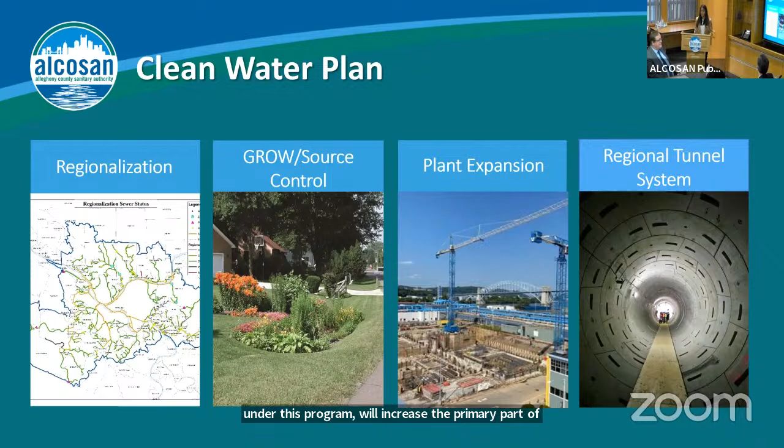These are the 9 projects under this program, which I'll go into in detail in the coming slides. The packaging and sequencing of these projects were done to minimize impacts and not overwhelm ongoing activities, since the treatment plant operates 24/7. It is active throughout, and at the same time we needed to make sure the phasing of construction maintains compliance with the consent decree milestones.

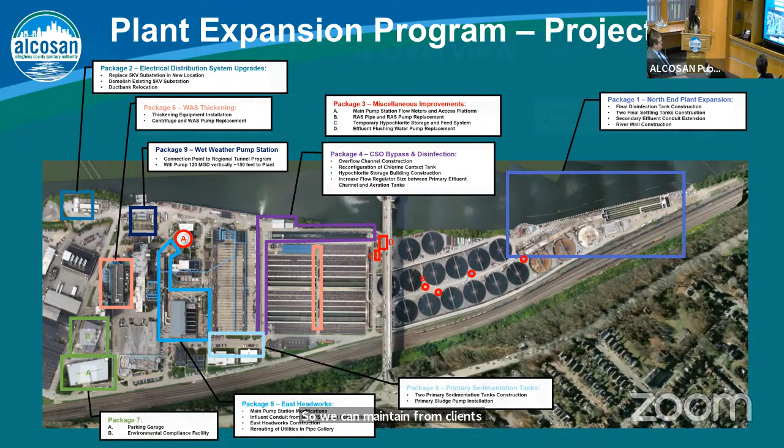The first milestone under the consent decree was to increase the plant capacity to 480 MGD by the end of 2025. The projects highlighted here are necessary to complete this milestone, including the North End Plant Expansion Project, the East Headworks, the CSO Bypass and Disinfection Project, and the WAS thickening.

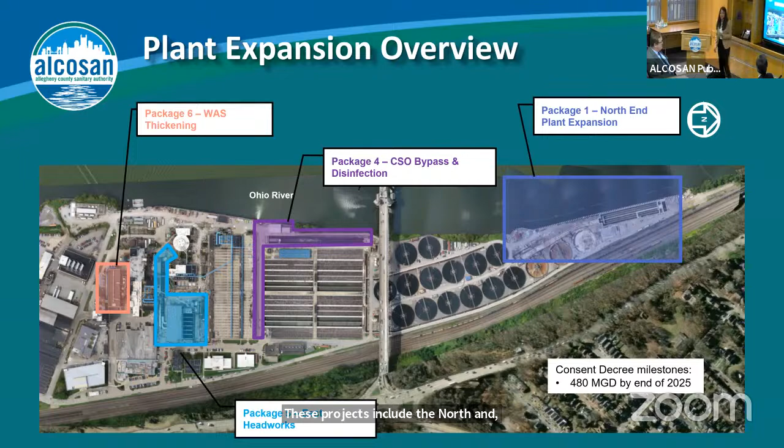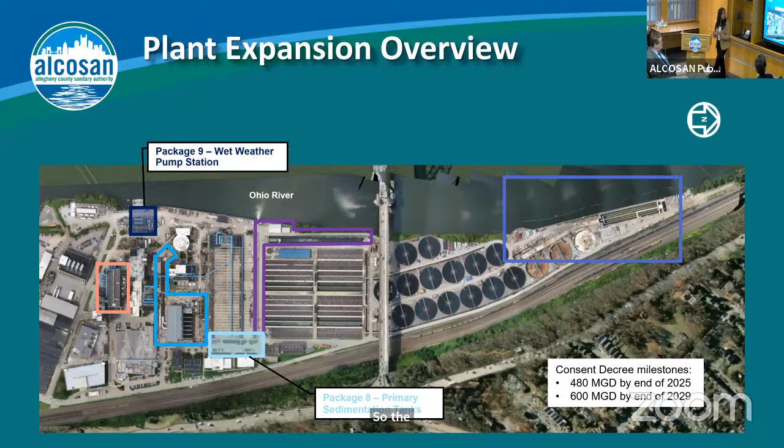The second milestone under the consent decree is to increase the treatment capacity to 600 MGD by the end of 2029. The wet weather pump station, as well as the primary sedimentation tanks, need to be complete by then to achieve this milestone.

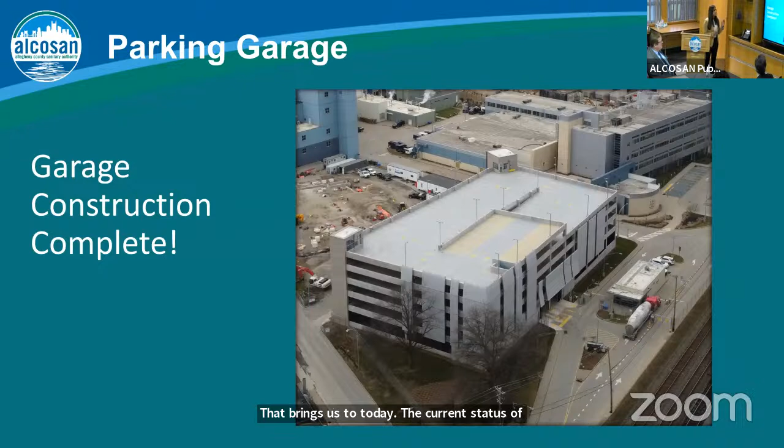That brings us to today, the current status of these projects. The first is the parking garage, which is complete and being used daily. The North End Facilities project is under construction. As part of this project, we have two new final settling tanks, one on the east and one on the west, and also a final disinfection tank.

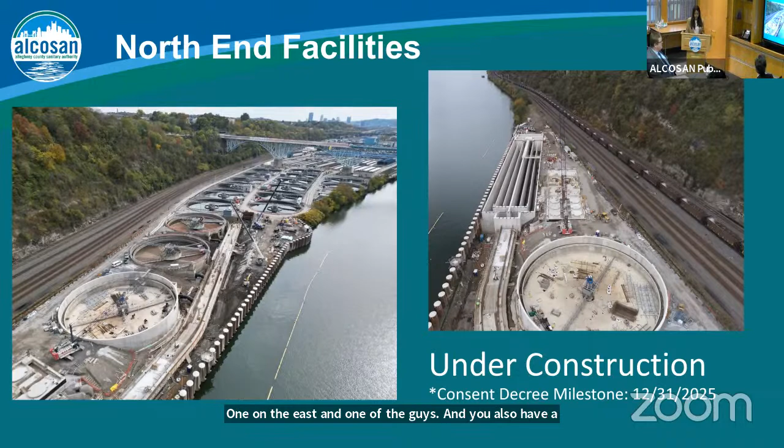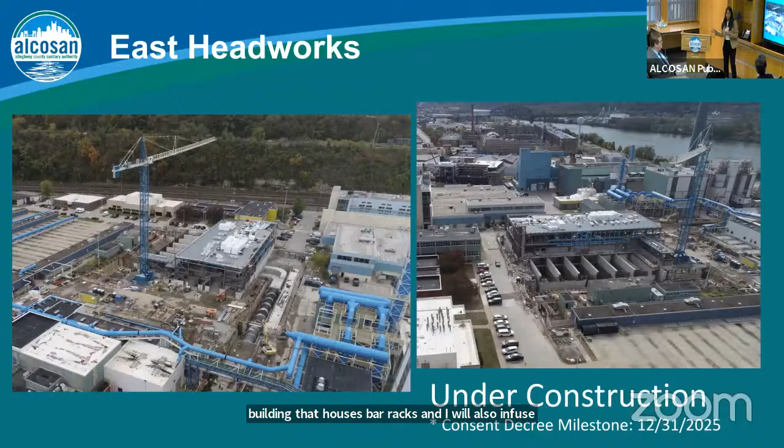The East Headworks is also under construction. It's a new building that houses bar racks and grit tanks, and includes an influent channel connecting to the existing main pump station and the future wet weather pump station. It will look very similar to the existing West Headworks facility.

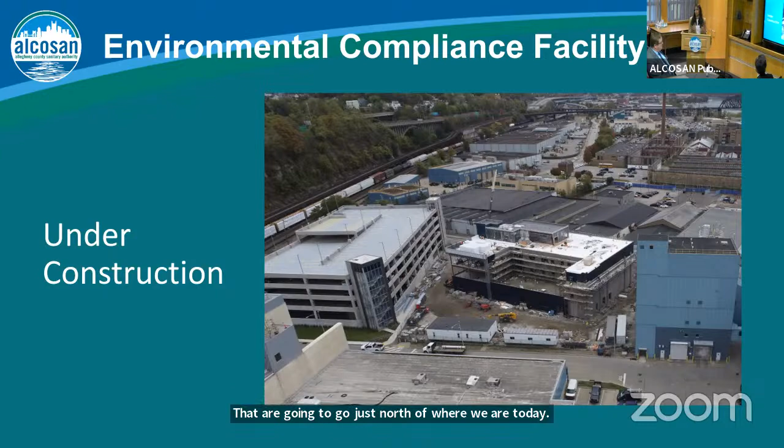The lab is also under construction. This project was required so we can create space for two new primary sedimentation tanks going just north of where we are today, so the existing lab facility needed to be relocated. The CSO bypass and disinfection construction contract has already been awarded, and my guess is it's going to ramp up really quickly in the near future.

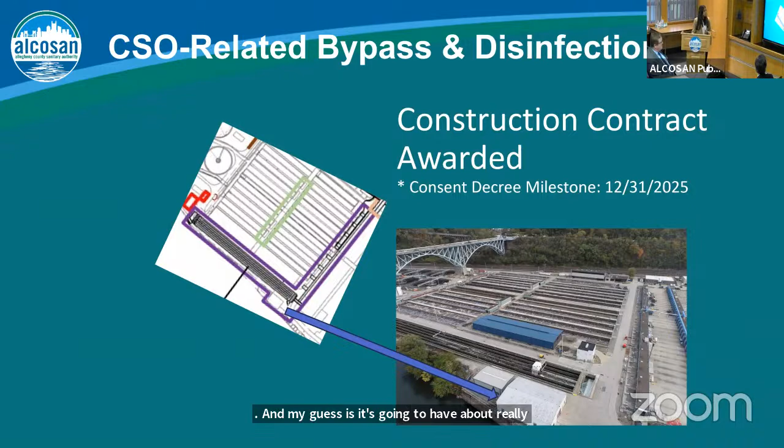That brings us to the last project, which is the primary sedimentation tanks, and I believe that is under consideration for award for design at the board meeting today.

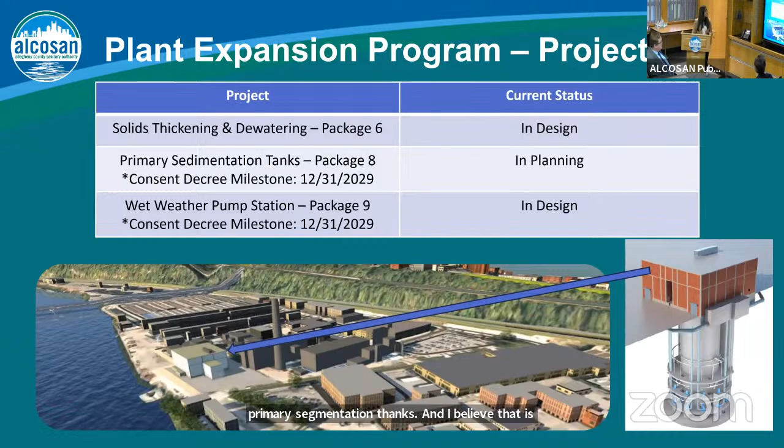So as a whole, under the program, about 39% of the work has already been completed. About 57% of the work under the construction contracts that have been awarded is also complete, and the value of work completed comes to a little bit more than $205 million.

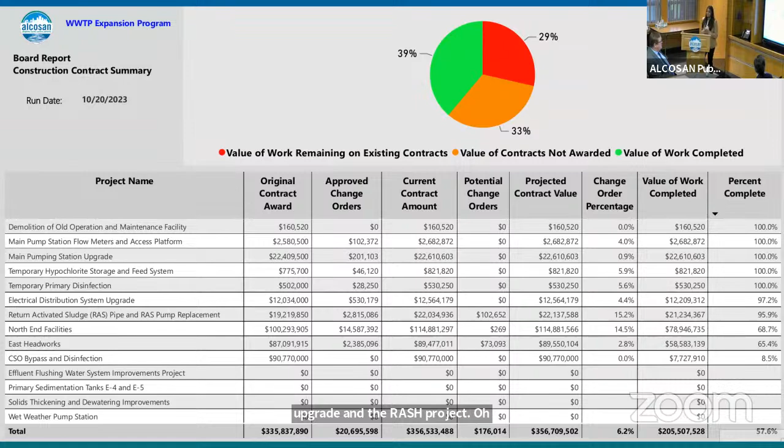We also have two projects that are very close to being complete, hopefully before the end of this year: the electrical distribution systems upgrade and the RAS project. Again, the CSO bypass and disinfection project is going to go into construction really soon.

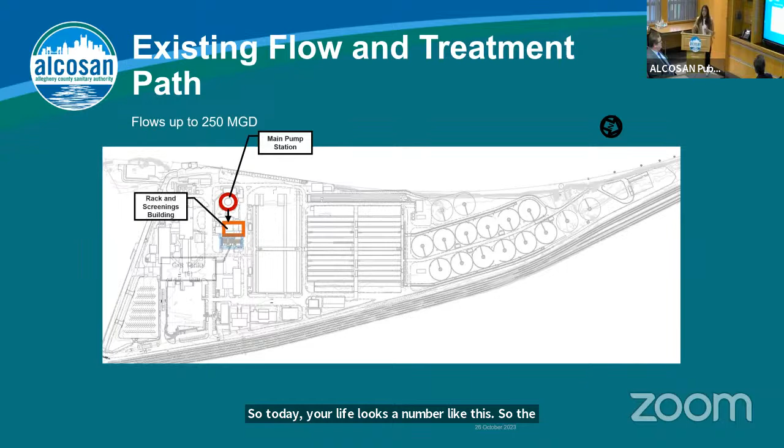Now I want to talk a little bit about the path that the wastewater takes once it enters the treatment facility. So today, the flow path looks a little bit like this: the flow comes into the main pump station, goes into the existing West Headworks, which houses the bar racks and the grit tanks, and makes its way into the primary sedimentation tanks.

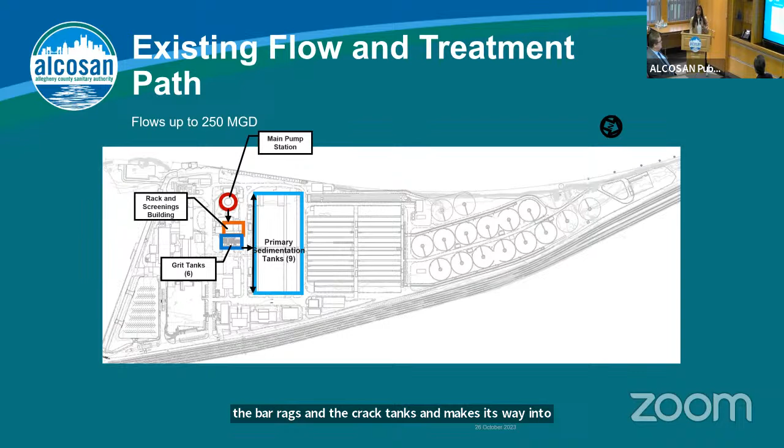After that, the wastewater flow goes into what we refer to as the secondary treatment processes. First it goes into the aeration basins, where the bugs clean the water, then makes its way into the final settling tanks. As a last step, the wastewater comes to the existing disinfection tank where the flow gets disinfected before it is discharged to the Ohio River via the existing outfall.

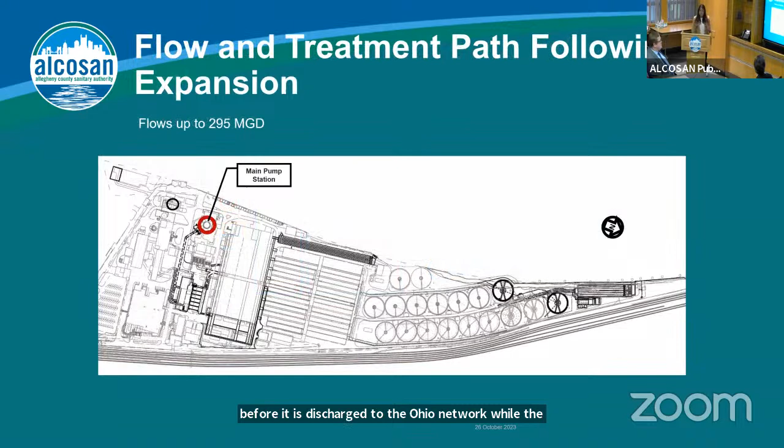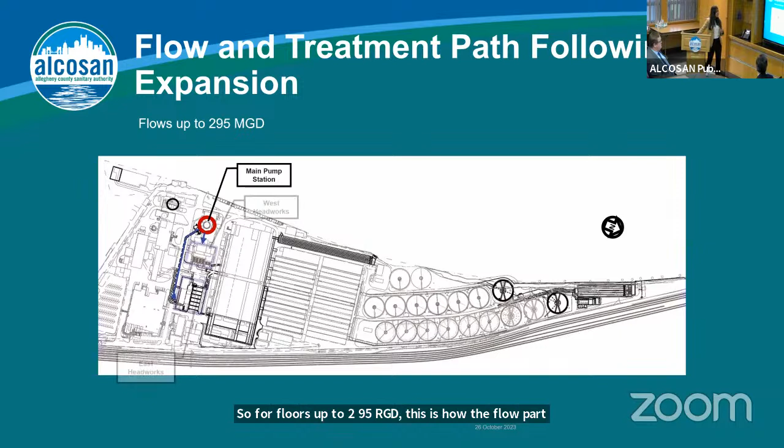As I mentioned before, under the program we are increasing the secondary treatment capacity to 295 mgd. So for flows up to 295 mgd, this is how the flow path will look for wastewater entering the treatment plant: it still comes into the main pump station, then it can go to the West Headworks or the East Headworks, making its way to the primary sedimentation tanks into secondary treatment processes, just like before. But here's the change.

The wastewater will continue to flow into the new final disinfection tank where it will get disinfected, before it goes out into the Ohio River through the new outfall being constructed at the north of the plant.

I want to focus a little bit on this area right here. That is going to be the spotlight of our presentation moving forward, and this is what I will refer to as the secondary effluent conduit. Essentially, the treated wastewater from the final settling tanks makes its way into the secondary effluent conduit to reach the final disinfection tank for disinfection.

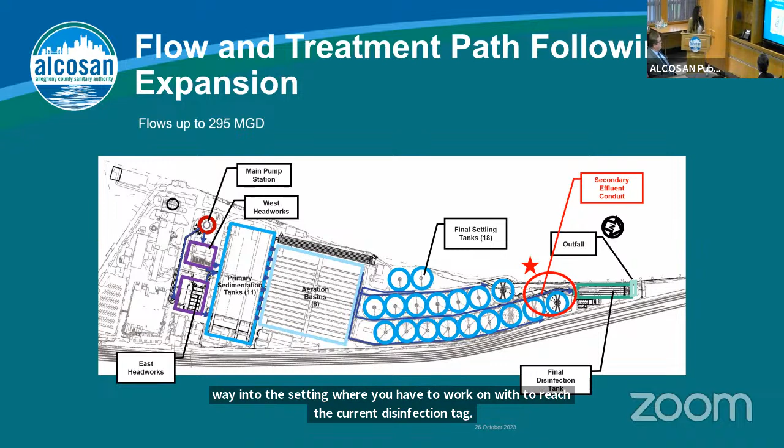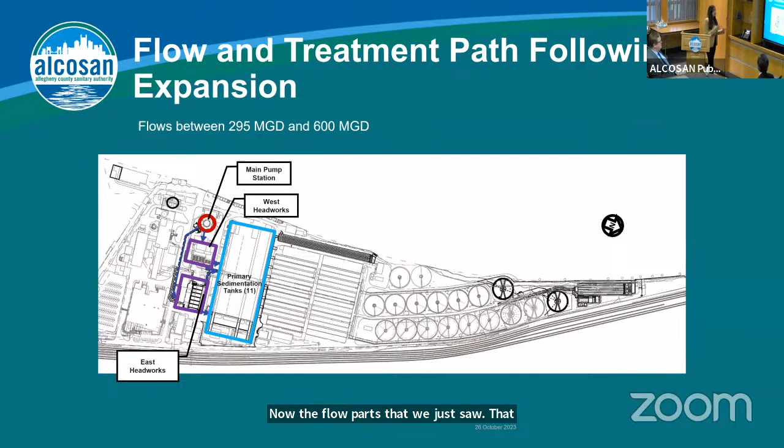Now, the flow path we just saw was for flows up to 295 mgd. This is how the flow path will look for flows above 295 mgd up to 600 mgd. It looks very similar until it reaches the primary sedimentation tanks. After that, however, the flow will be diverted to the existing disinfection tank, which under the program is being reconfigured to act as a bypass disinfection tank. This is where the flow will get disinfected and discharged into the Ohio through the new relocated outfall.

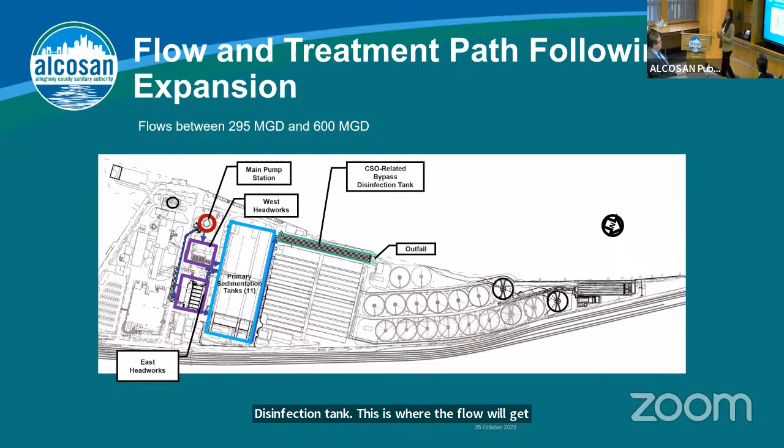Okay, we're going to shift to the spotlight now. As part of the North End project, we are extending the existing secondary effluent conduit to reach the final disinfection tank. The gray area here represents existing infrastructure, and the greenish color refers to new construction.

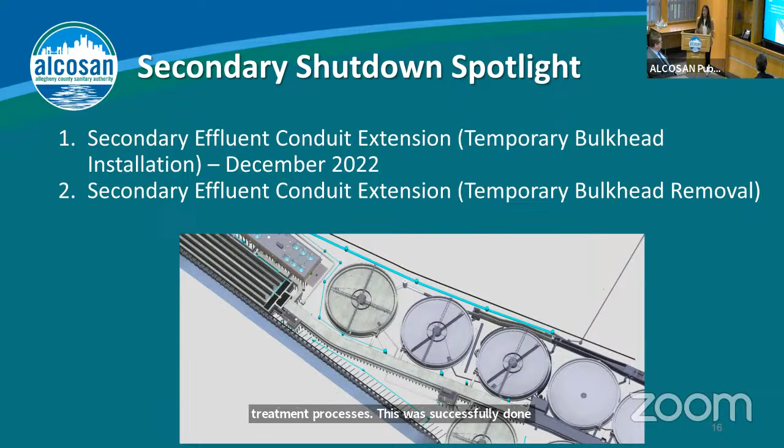Now, in order to begin constructing this extension of the secondary effluent conduit, we needed to put a temporary bulkhead right at this tie-in point between the green and the gray. To put in this temporary bulkhead, we needed to shut down the secondary treatment processes temporarily. This was successfully done in December 2022, and the shutdown lasted approximately 3 days.

Just a quick recap: the existing flow path goes from the main pump station into the primary sedimentation tanks, into secondary treatment, the flow gets disinfected, and then out to the Ohio.

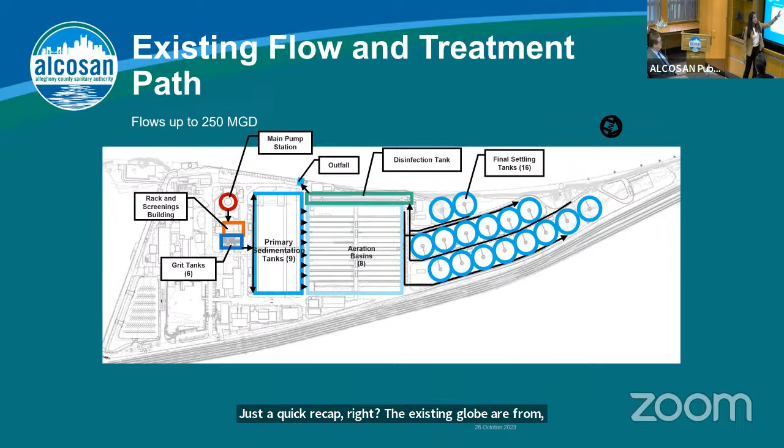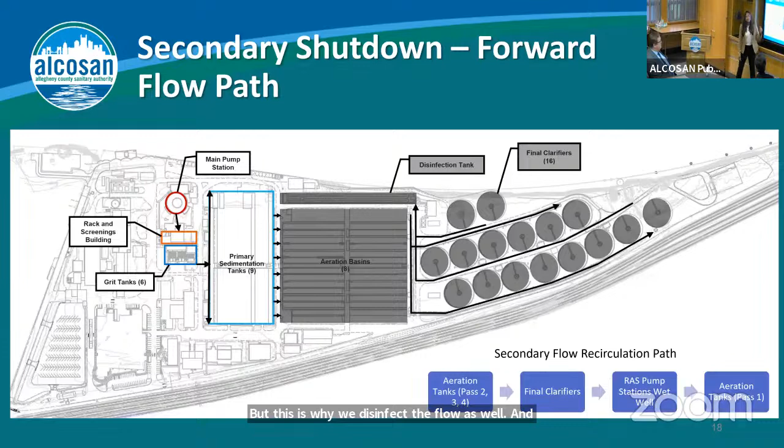However, during the shutdown, just for these 3 days, the flow did make its way to the primary sedimentation tanks, but this is where we disinfected the flow as well. Rather than going into our secondary treatment processes, the flow was discharged to the Ohio through the existing outfall, fully disinfected.

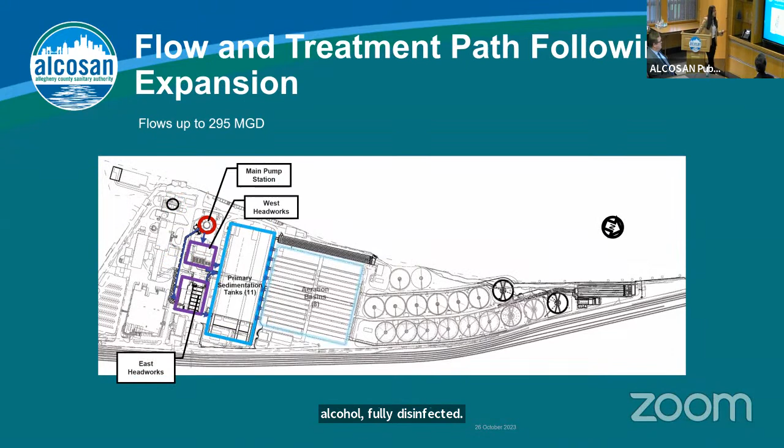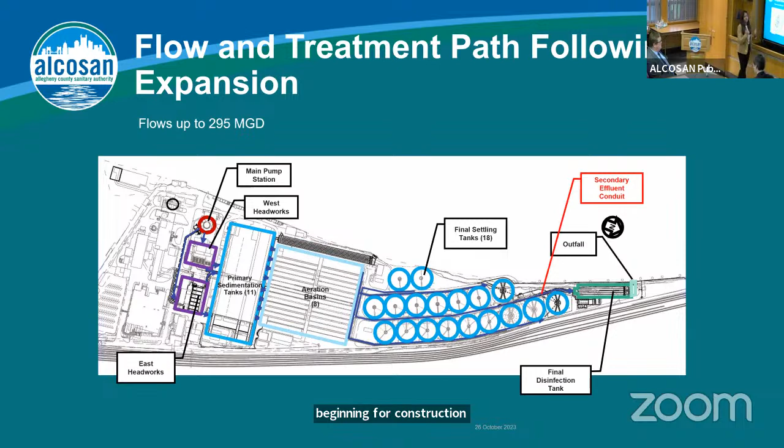So again, this was done so we could put the temporary bulkhead in and begin construction of this secondary effluent conduit extension, so that the treated flow can reach the new final disinfection tank.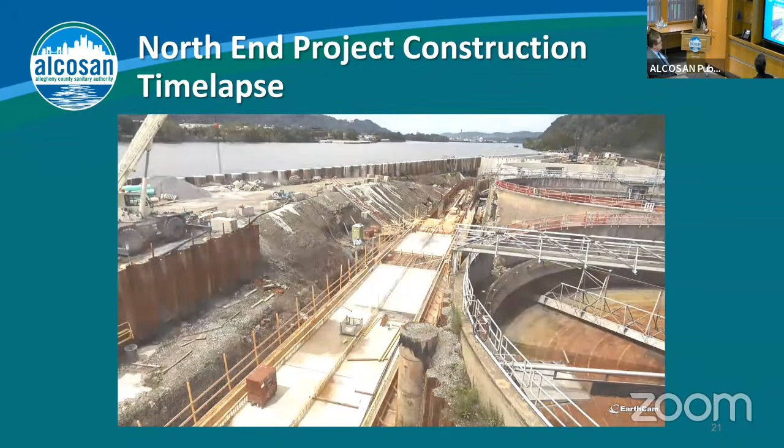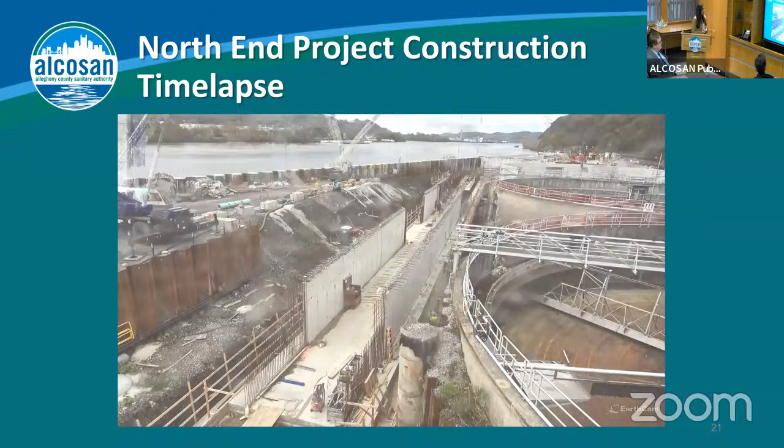I hope that puts things into perspective. But collaboration was absolutely key in implementing the secondary shutdown successfully. We had 9 workshops before the shutdown happened, so we could make sure all questions and concerns were addressed. Several field tests were also conducted to make sure all the processes and equipment would work the way we hoped during the shutdown. All of that led to more than 500 hours of brainstorming, problem solving, and knowledge sharing to make sure we still comply with our permit even though the secondary system is shut down.

Multiple stakeholders were also involved and engaged, including 3 departments at ALCOSAN and a high degree of involvement from O&M staff. Soon we will be kicking off these workshops once again in preparation for the next secondary shutdown to remove that temporary bulkhead. So the circle continues.

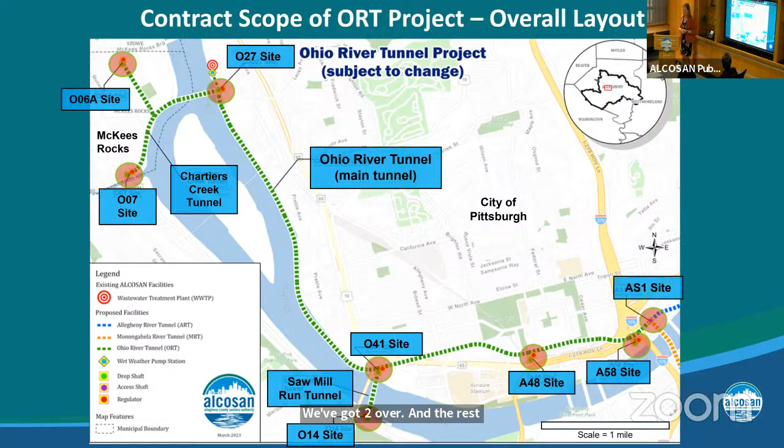At a high level, we've got about 5.5 miles of total tunneling length divvied up as such. Obviously, the main leg of the Ohio River Tunnel is our biggest diameter at 18 feet. The dewatering tunnel will take the flow from that upstream shaft at O27 and convey it over to the wet weather pump station. The wet weather pump station will be bid as a separate contract, but they will work together.

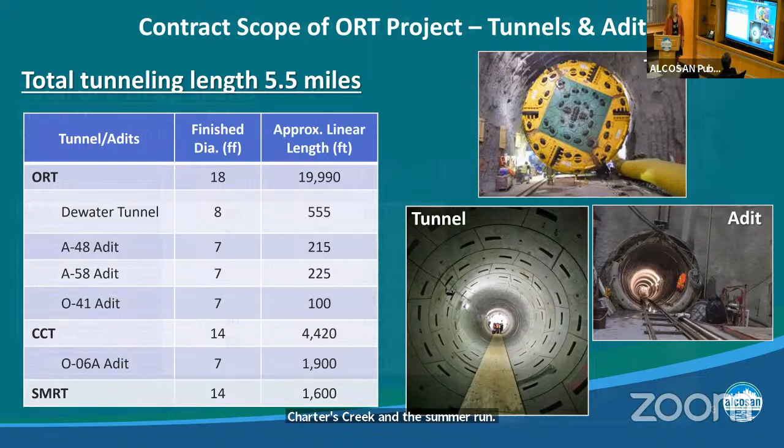And then we've got 4 adits - connector sewers, or connection tunnels, all 7-foot diameter in this case, that will take the flow from the regulator and get it over to the drop shaft. And then we've got our two 14-foot diameter tunnels, the Chartiers Creek and the Saw Mill Run. So that's our project at a high level. We also have 8 deep shafts.

We have 2 access shafts and 6 drop shafts. They range in diameter from 25 to 70 feet, and in depth from 125 to 160 feet. The diameter is sized according to the flow from the upstream sewer shed, so they've all been uniquely sized and designed depending on where they're located and what types of flows they're anticipated to receive.

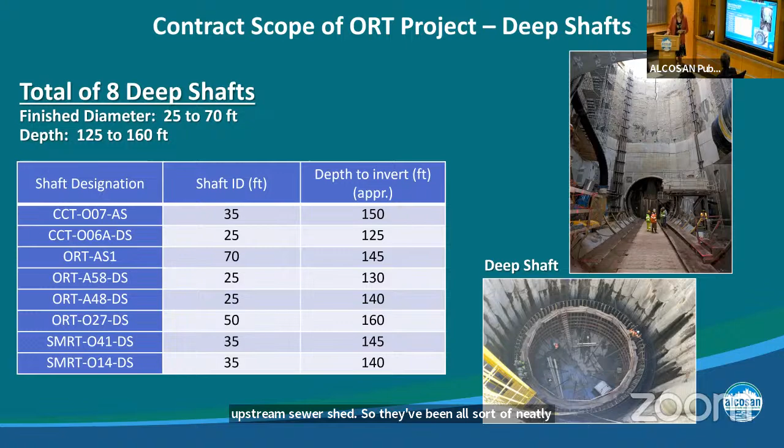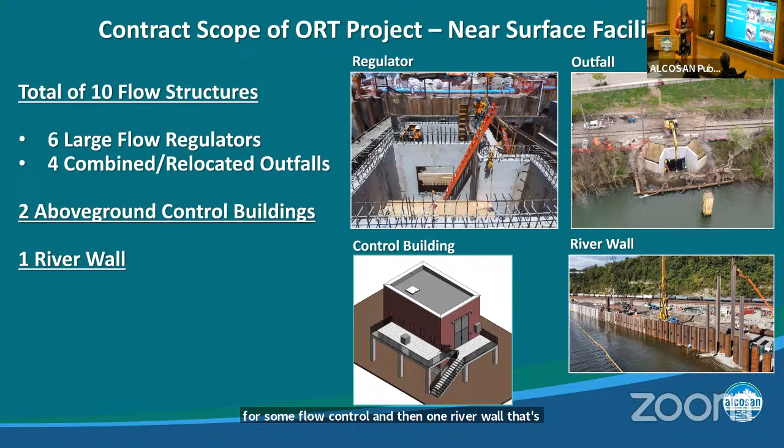In addition to the tunnels and adits, we've got the flow structures, the regulators, outfalls. We've got 10 flow structures that we anticipate, 2 control buildings where we'll have gates for flow control, and then 1 river wall. That's the river wall that Rich talked about, but we'll have another one just upstream in one of our near surface facilities.

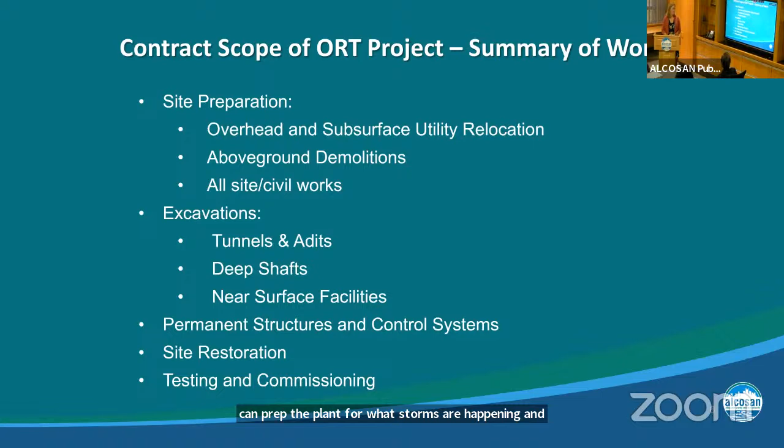So in summary, we've got the site prep required for all the property and near surface facilities, and a tremendous amount of excavation for the tunnels and adits, for the deep shafts, and for the near surface facilities, including the regulators. We've got a couple permanent structures, and a control system in place so we know exactly what's going on in the tunnel, and can prep the plant for what storms are coming. And then we'll make sure sites are restored, and do some testing and commissioning. So here we are right now.

We've completed the 60% design, and the team is moving forward to 90% design. We'd expect to complete the design by the middle of next summer, bid it 3rd quarter of next year, so that we're in a position to start construction in January of 2025. Then we'll be in construction of our first tunnel in a long time, between 2025 and 2029.

So if anybody asks, it's contract 1797. I'm happy to take questions. But that's our Ohio River Tunnel.

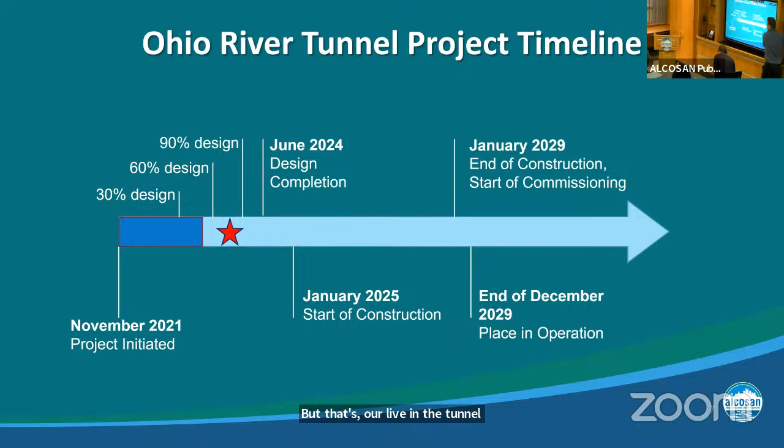I don't believe we have any questions, since we've kind of covered this. But I will ask for a motion and a second to approve, please. It's an honor to make this motion for sure. Yes, this is an honor to second.

Before we move forward, we can touch base briefly. Sometimes as engineers, we get kind of caught up in the tech side of it.

Unless you have X-ray vision.

All right, we did have a motion and a second. Could I please hear how many of you will approve this, by saying aye. Aye. Aye. Ayes have it. It is approved, finally. Too bad we should have had some streamers.